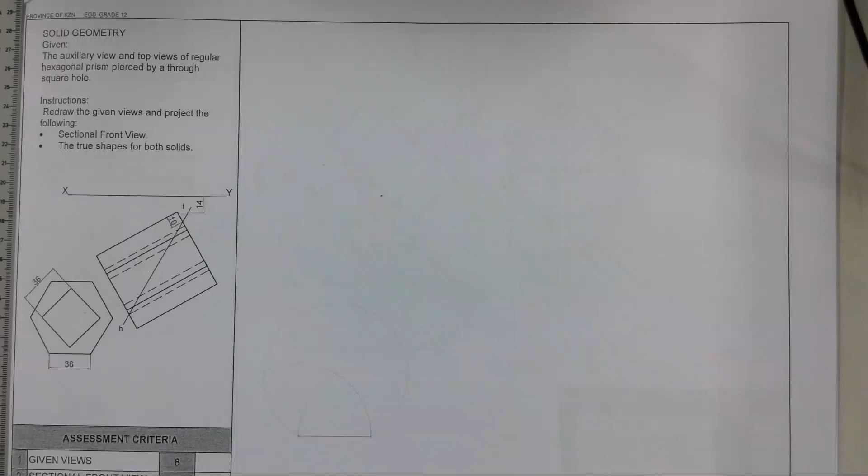Good day, gents. So today we're going to be making an example of this solid geometry question.

I'm going to read it for you. The auxiliary view and top views of a regular hexagonal prism pierced by a through square hole. Instructions: redraw the given views and project the following. Sectional front view, and they would like to have the true shape of both solids.

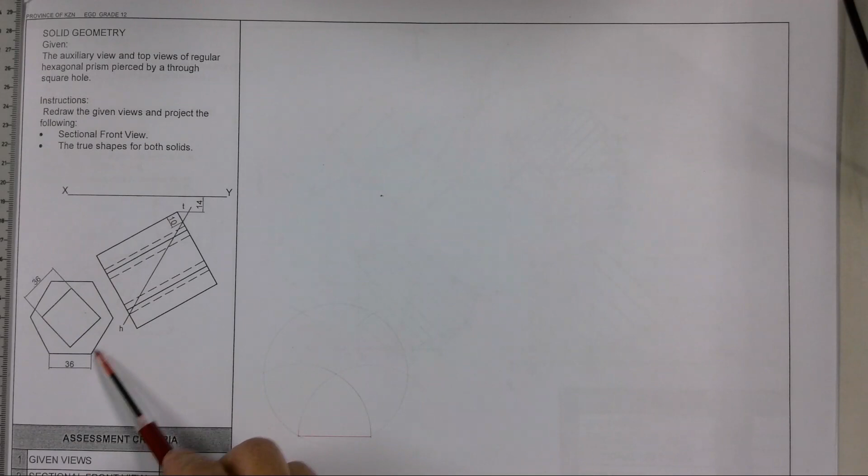So this is obviously an edited version, and when they say the true shape of both solids, they mean the fact that there's obviously a hole through this main solid. Therefore this will have a true shape, the outside hexagonal base, and therefore the inside will also be a true shape, yet it will be treated as a hole.

So I'm going to start off with drawing the auxiliary view first so that I can get to my original view. And in this case here, I've already started. You'll notice that I've got my 36 millimeter base edge down, and I've started constructing by simply drawing with a circle. I could use my 60-degree set square, and so I've gone ahead and joined my construction points already over here, and I'm going to use my 60-degree set square to confirm these points.

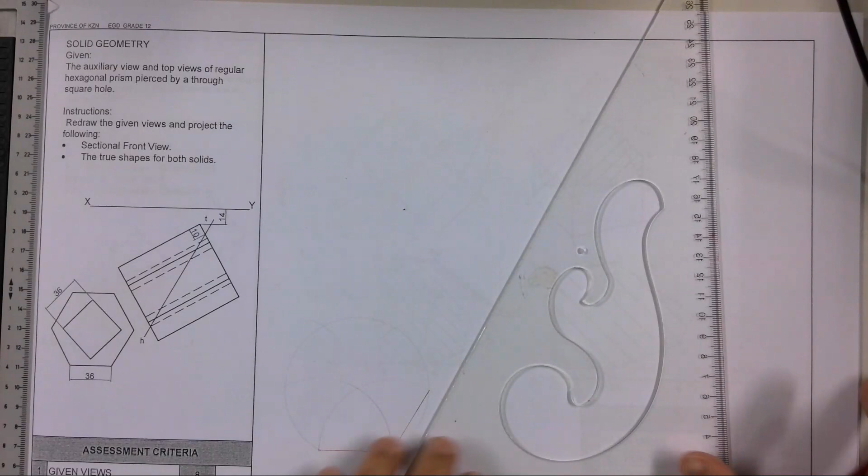And I'm going to keep them in construction. Now I'm drawing with a red pen in this case over here, which is just lightly, just to indicate that which is going to be used.

Alright, and then I also could put my set square to the actual question. You'll see over here that it is actually at a 30-degree angle. So I'm going to be using it because the question doesn't actually state that it is at 30 degrees, but I'm going to start projecting off at 30 degrees.

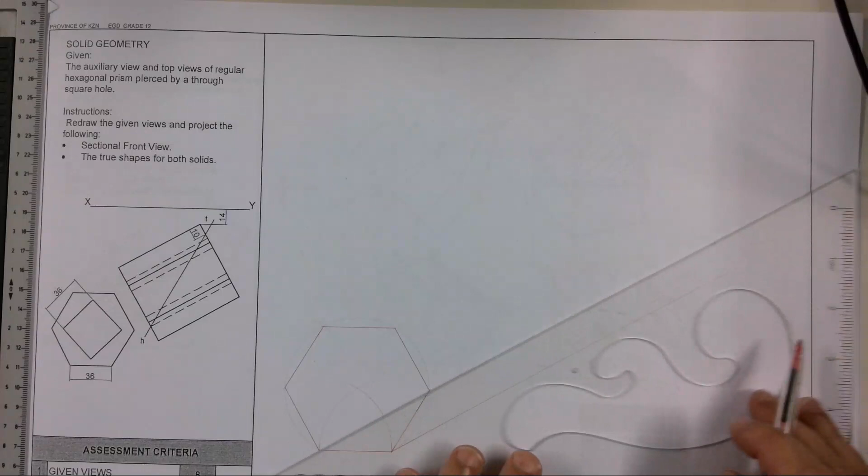The question also doesn't state the height of it, so there's obviously a little bit of an omission of information. I'm going to just make it 70 millimeters. I'll pop the 70 in over here. Alright, and also remember that if you don't have information like this, they might have placed it in the actual question above, which they haven't in this case.

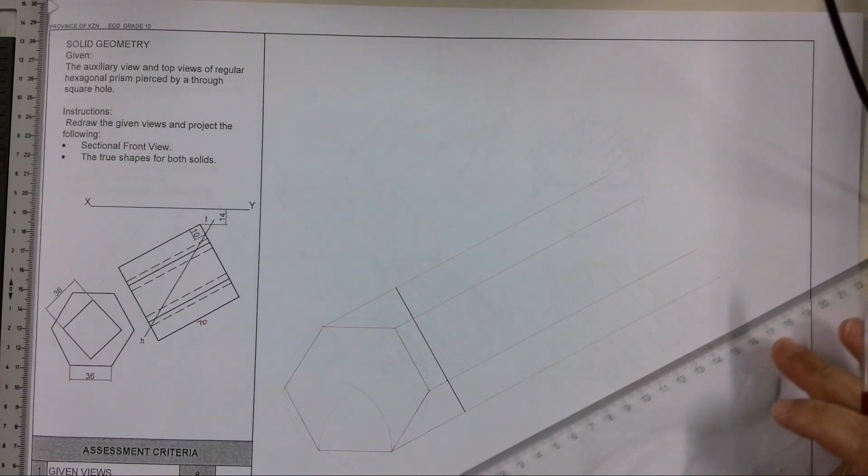Alright, so now from here I'm going to make about a 10 mil difference. At 60 degrees I'm going to separate these shapes, and I'm going to go ahead and draw my view. I'm going to measure off my 70 mils. This is obviously going to go a little faster because these are given views.

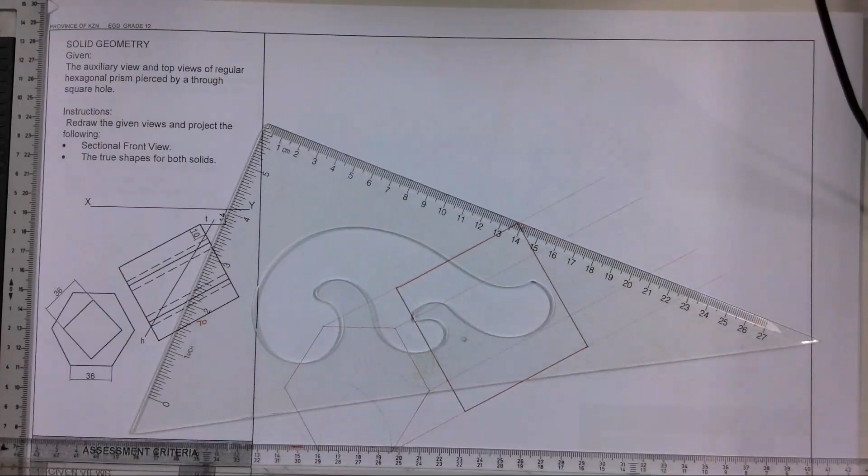And I've got to be careful because if I look at my cutting plane over here, they're literally going to be cutting at 60 degrees as well. Okay, so make sure that you've got your T-square nicely lined up so you get that accurate 60-degree cut. But I'm not going to be focusing on that too much.

It might not be completely 60 degrees because here I see they've actually added a 10 millimeter point. So if I go 10 millimeters in, I'll have my first cut point. And then it's going to go through the bottom corner over here. So I'm going to make sure that that happens. And that I can only do once I've got the auxiliary view properly drawn. So I'm going to go ahead and do that right now.

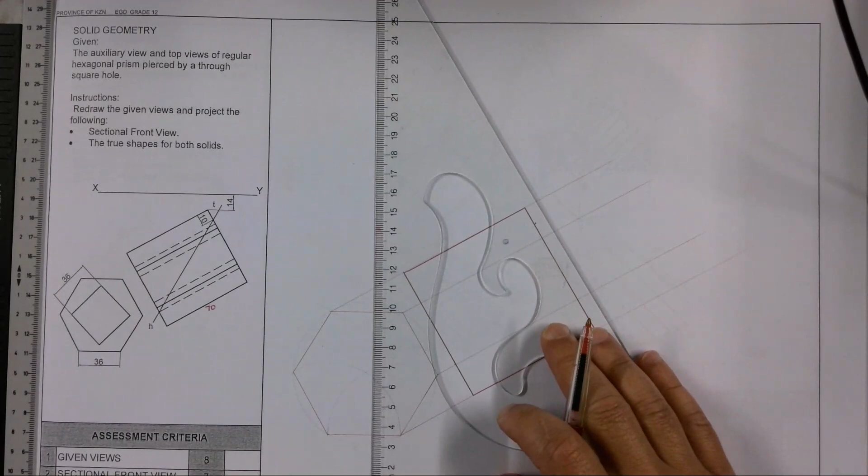I'm going to find the center, which was easily done with the construction of the hexagon. Simply join my diagonals if I have to, and I'm going to use my 45-degree line, but now I have 36 as a base edge, okay, on that question over there. So I'm going to just slide this across again for you. There's your 36 millimeters over here.

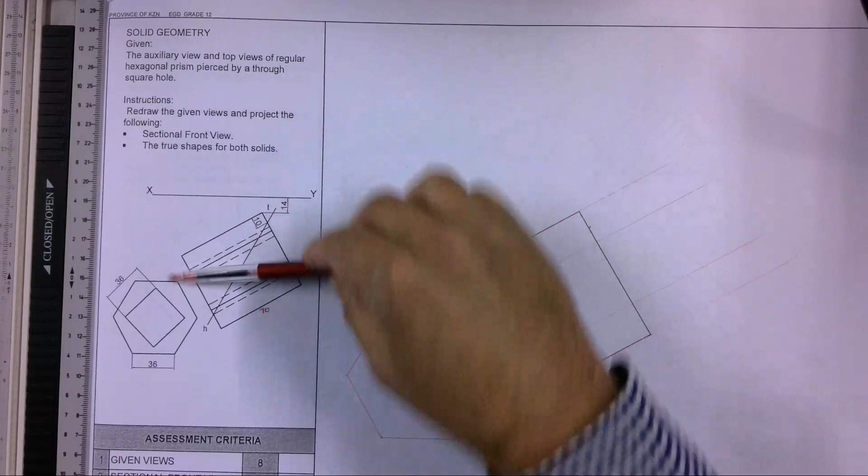So what is the distance from the center to that point over here? Well, I know that if this is 36, I'll be able to divide it into two, which is 18 and 18 from midway. Okay, and if I had to go through the middle at 45 degrees, I'd simply be able to go and measure off the 18 either way.

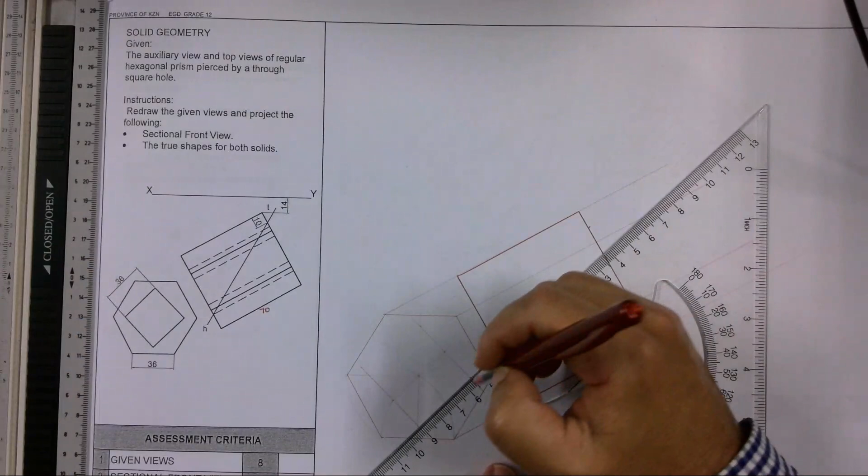Stipulate my 18 on this side here, and I'll go and measure my 18 on this side here, and I'll go construct a 45 degree line and a 45 degree line there, and then I'm going to go take the 18 from here and another 18 from the middle outward, and I'll take my 45 degree line and join them. Now you'll find that they would join nicely on that center line.

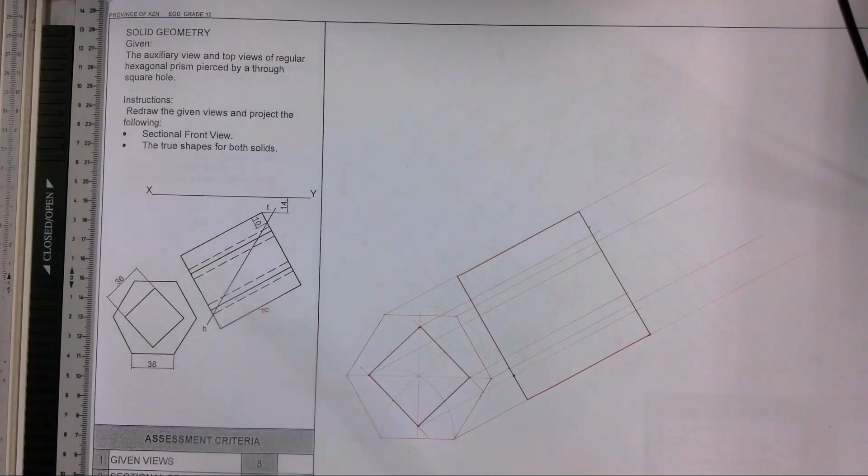Okay, and I need this to obviously project back into my necessary view. Okay, and we're going to project at 30 degrees each one of these, and they said that this shape is going to cut 10 mils in, and it's going to cut through this point over here, so not necessarily 60 degrees.

Now there's my cut line, VT, or sorry, an HT, because it is a horizontal trace, because this drawing is done in the horizontal plane, which gives me my top view. I'm going to take my 14 mils away, construct my XY axis, and if I want to cut off a little bit of time, I'm going to go ahead and project that which I will see.

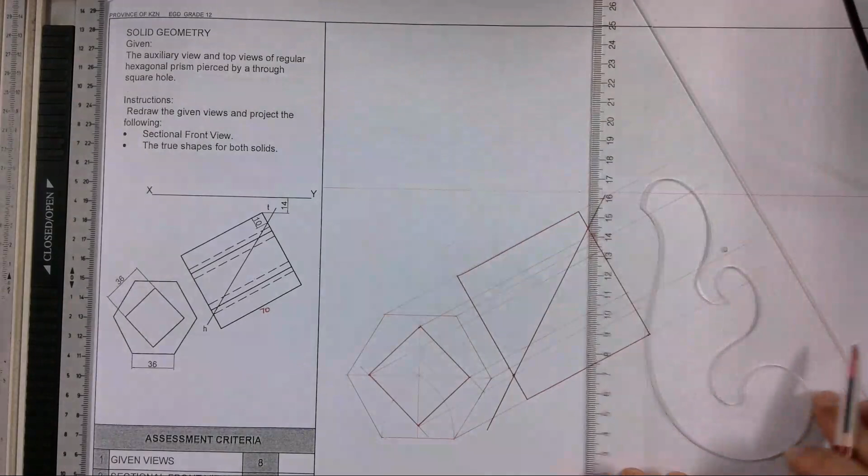I know that there's a cut line here, or cut point rather. I like to distinguish between cut points and base points. Okay, and then I've got to realize, but hang on, I've got a couple of hidden detail lines that need to be drawn, because I'm also going to be cutting through a hole. So this is obviously a hidden detail line. Like so.

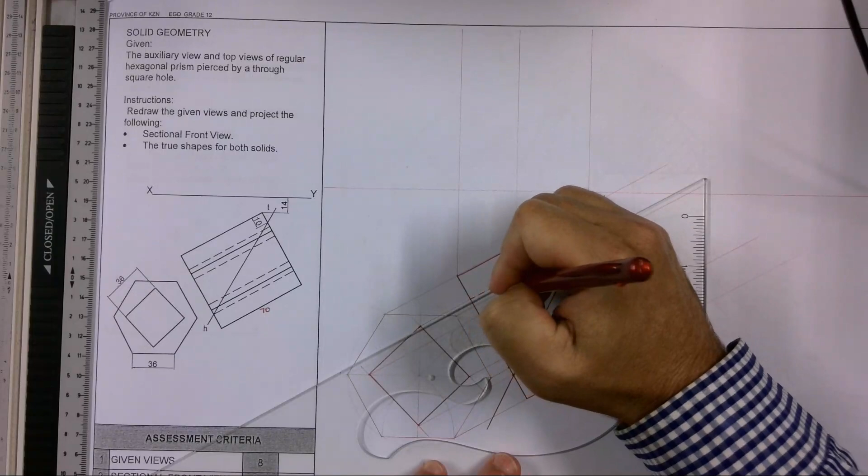I was very quickly going to get these done. Try and stay as consistent as possible when it comes to your hidden detail lines. Alright, and then obviously I have solid lines here for my hexagonal prism, like so. Right, now I'm going to focus on my cut points over here.

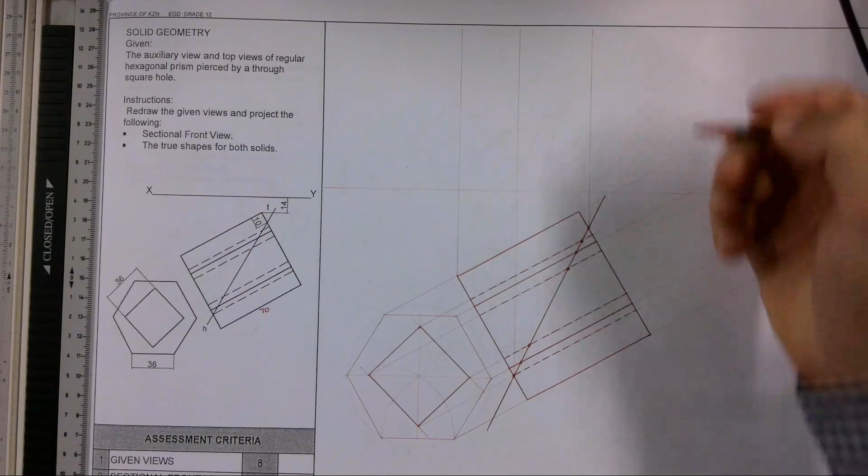I've got a cut point, another cut point, because my cutting plane is going through this object. A whole lot of cutting points over here, and this is where the intricacy starts. This is where I like to start numbering my drawing. So I'm going to start here with 1, 2, 3, 4, 5, 6. 6 has got a top and a bottom. 1 and 5 has got a top and a bottom. 2 and 4 has got a top and a bottom, and 3 has got a top and a bottom.

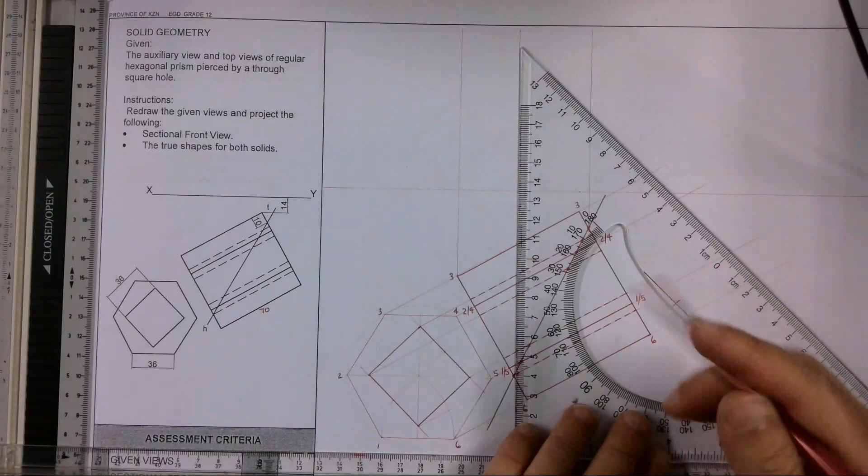Okay, that's very necessary. You'll see that I haven't started numbering or lettering the inside, because I'm just going to be focusing on the hexagonal prism for now, and I'd like to go and project all the information that I have, knowing that I'm going to be cutting this front portion off. So I'm going to be seeing that. I'm going to be looking into there, looking at a cut surface over here, and imagine that we're also going to be seeing the actual base, or the portion that's left over of the base.

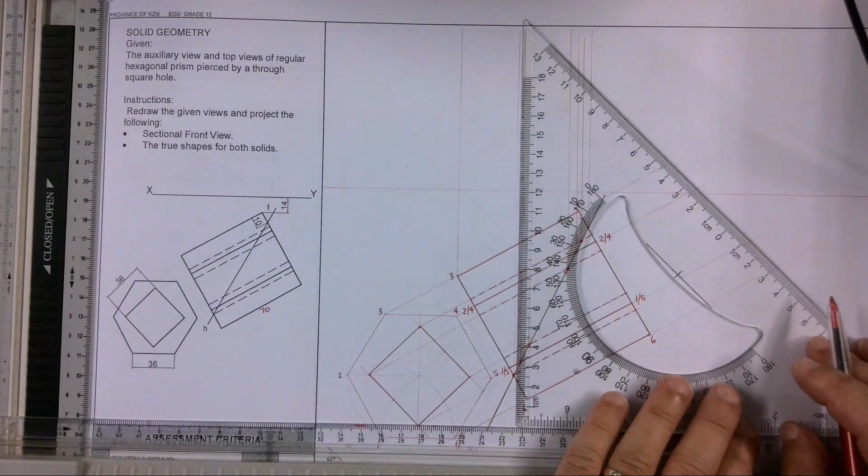Alright, so here we go. I'm going to project all my cut points up. Let's give it a bit of length over there. All my cut points. Actually I only wanted to focus on the cut points of the hexagonal prism, but I'm going to project them all up anyway, and then I'm going to focus on the base points. So the cut surface I need to find.

So I've got 6, and 6 stays. It gets cut away. Therefore, I'm going to next focus on this point over here. I've got to realize that I'm cutting between 2 points, 1 and 6 and 5 and 6. If I want to, I could simply go take this information back onto my auxiliary view and note that this belongs to the hole.

Okay, so watch out. But remember, when I'm cutting through this area over here, this here is cutting between 1 and 6 and 5 and 6. So between 5 and 6, it cuts through over here. And on the back end, it's cutting through over here between 1 and 6. So this just gives you a little bit of a representation as to where it's going to be cutting as well. Right?

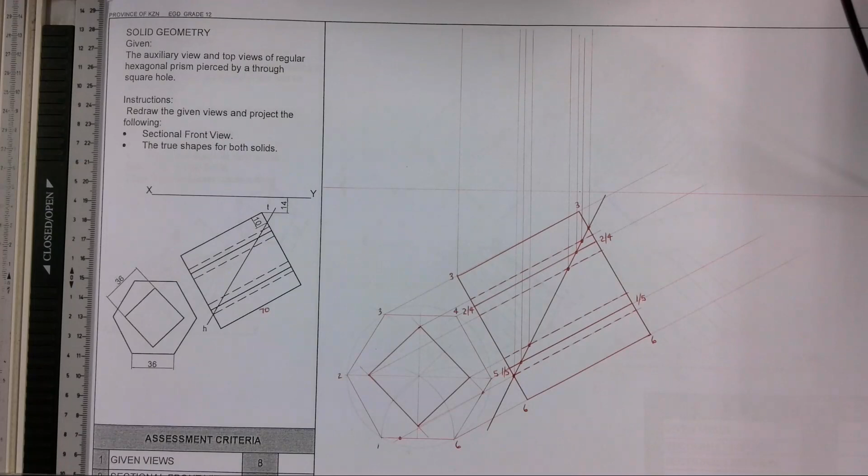So I'll go ahead, I number each one of these points over here. So there I've got to realize that those are going to be my letters. I'm going to call it A and B. And if I go through this, I've got cut point 1 and 5. Then I'll have another cut point, which is the hole, cut point 2 and 4, which I'm going to focus on, another cut point, or 2 cut points over here between 3 and 2 and 3 and 4. This is on a base edge.

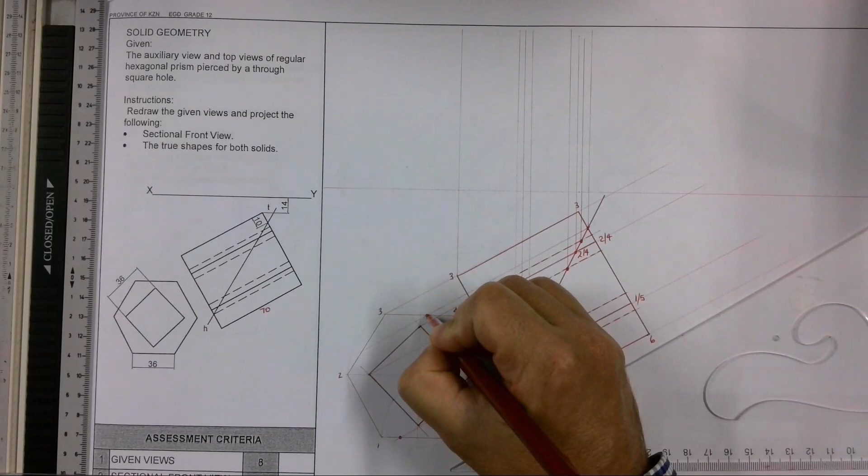Yet again, I can go and project this information back, and I'll be able to see that between 3 and 4, it'll cut over here, and between 2 and 3, it'll cut over here. So there I've got a bit of information as to where it's going to cut. Okay, now the whole idea here is I've got the auxiliary view, and I've drawn it 10 millimeters away from this point over here on purpose so that I can make use of that as a reference point to each one of these heights, as cut points and cut lines.

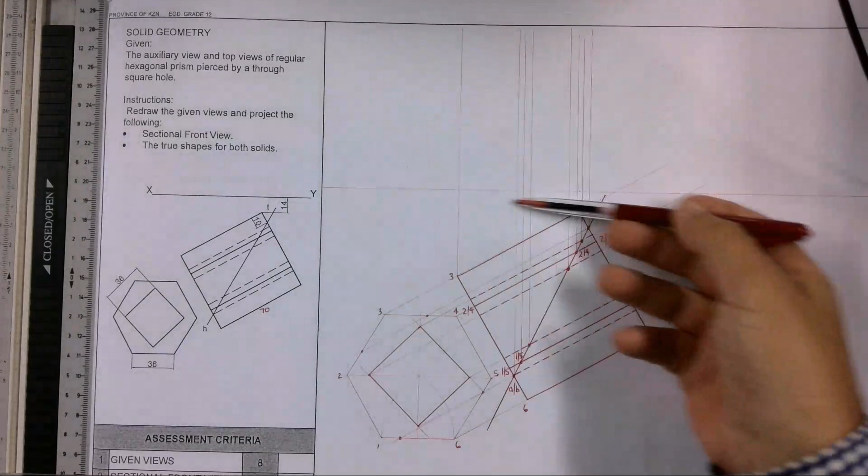Okay, so like I use the term, I need to be able to see the bread before I cut the bread. So I'm going to simply take this area here as being the bread, and I'm going to make sure that I can simply plot the heights. I've got the necessary widths, I just need to measure off the heights. Over here I've got letters C and D, so we'll say that was C and D.

Alright, and I'm going to use those heights now from my reference point, and that's going to be my reference point from which I'm going to be measuring. So I'm going to go from the reference point to C, and C from my reference line, and I mark off and I label it C.

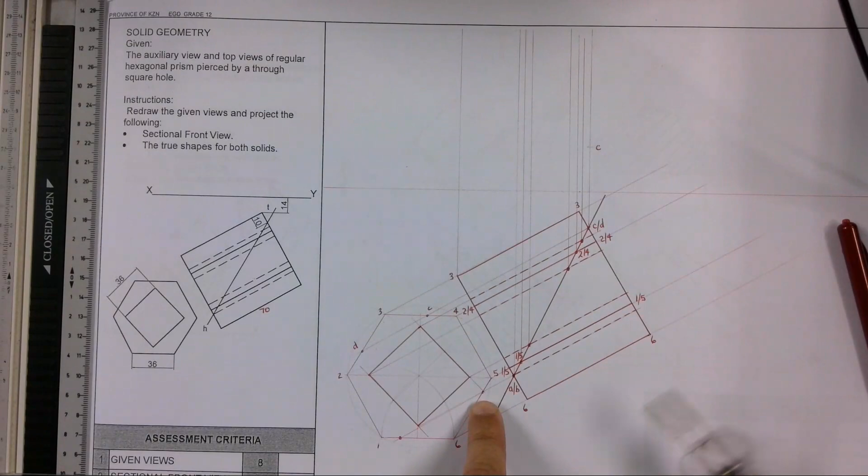I've got the same scenario here. Okay, I label these A and B. I'm going to call this one B and this one A. So on this line over here, I'm going to just produce this slightly to B. When I projected that up from there, I projected, and now I found B.

On that same line over there, I'm going to extend it slightly to A. Along the same line, I'm going to mark it off and find A. So this is just a measure and plot. If I'm projecting off of this view, I'm measuring off of this view. So there's always one view behind I'm measuring it off.

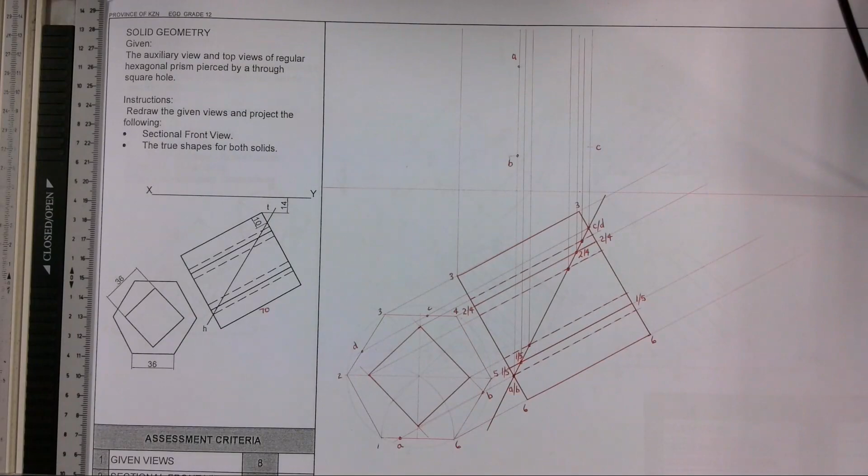Okay, so I've got C, my reference plane, I'm going to make use of D. D is on my reference plane, labeled over there. Okay, so now I've got these two, and I've got the other side, these two. Alright, we know that when we cut through there, they're going to join one another. So I'm going to go ahead and simply join them, because the more I draw, the more I'm feeding my brain with some images. I can actually see what this thing's going to look like.

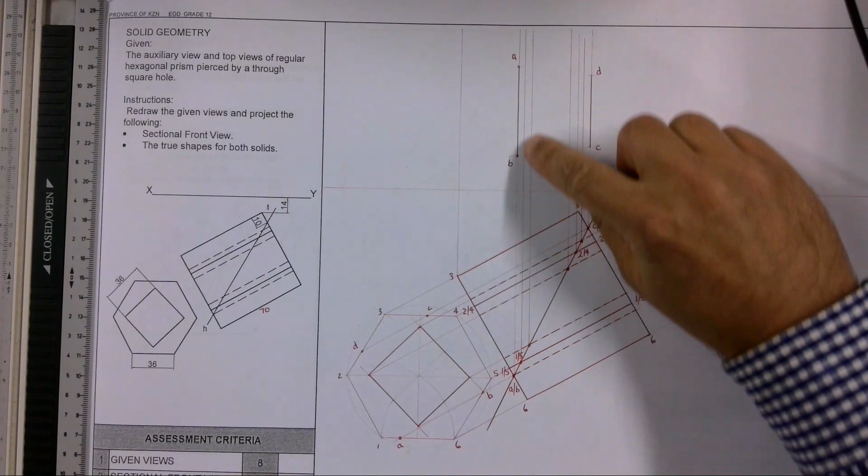Right, my next ones are going to be 1 and 5. So from 1 and 5, cut point 1 and 5, I projected it up. Okay, and I'm going to go measure from there to cut point 1 and 5. Notice that I have a little distance over here that stays behind. Okay, but the heights don't change. So I've still got to measure off of the actual heights.

So number 1, from 1 and 5, notice what I've done over here. I've measured from the reference line to the height of 1, and I pick it up and I go to where number 1 and 5's cut point is, because I'm doing number 1 now, and I follow it all the way to my reference line, and I mark off number 1.

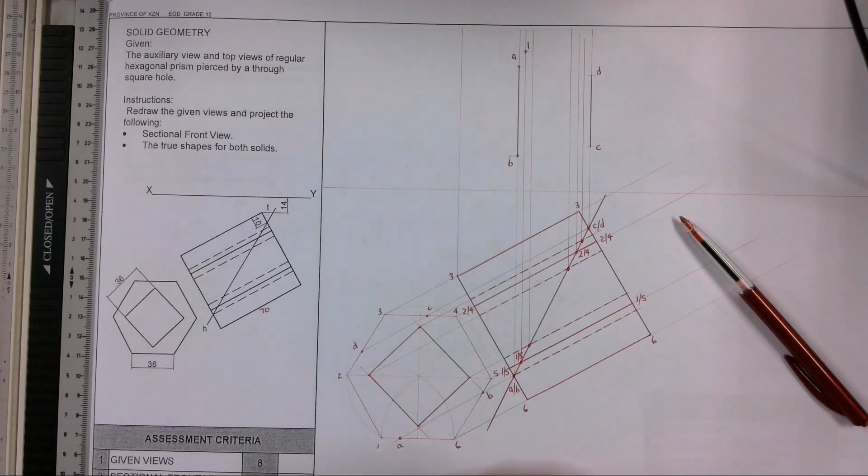Please be sure to pause and retake that if you haven't seen it in the video. But I'm going to be doing this over and over again. Just notice I'm on the reference line again, which I've made 10 millimeters away. So therefore, my front view will be 10 millimeters higher than the ground or the horizontal plane.

Here's number 5. I pick it up. I go along number 5's line, and I go mark it off. Number 5 and number 1 done. Remember, I'm only focusing on the cut surface, so I'm finding all the cut points first. Very strategic. Now I'm going to go to the next one.

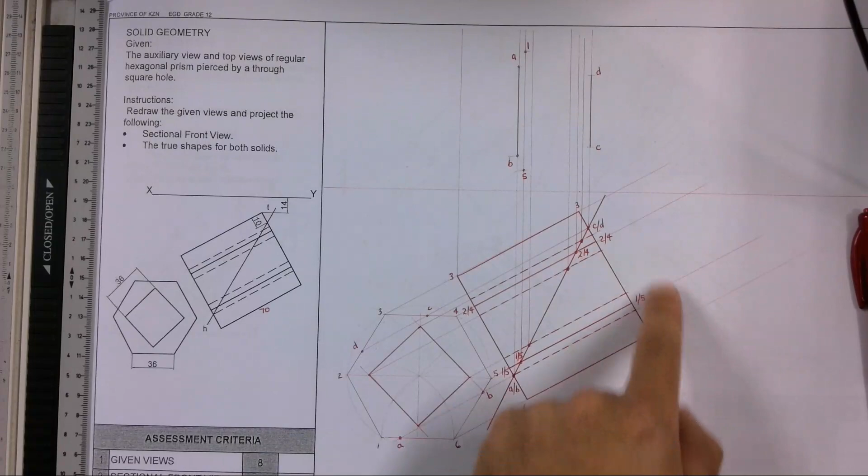It's 2 and 4. Remember, I'm focusing on the hexagonal prism. So 2 and 4 is the next one. I'll go to the reference. Notice that 2 and 4, there it is over there. I'll have 4 at the same height. There it is over there, 4 at the same height. And also at the same height as 1, coming across will be 2, just like 1 over there.

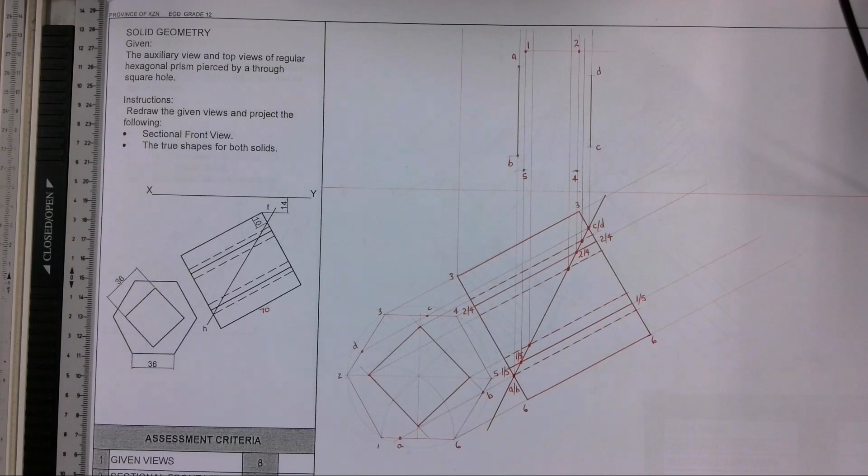So I'm simply going to use my T-square and I'm going to project it right across. I know those are going to be there. So there's 2. I project that on up. There it is now, number 2. Okay, and I know that they're going to be connected to one another. Or will they? 1 and 2 at the top definitely will be. 1 to 2. And obviously I'm looking from either this direction. So here we go, number 1 to 2 will be connected.

And they will be connected down to their cutting points as well. So you'll notice there it goes from 2 down to C, C to D, D back down to 4, 4 all the way to 5, 5 to B, B to A to 1, 1 back to 2.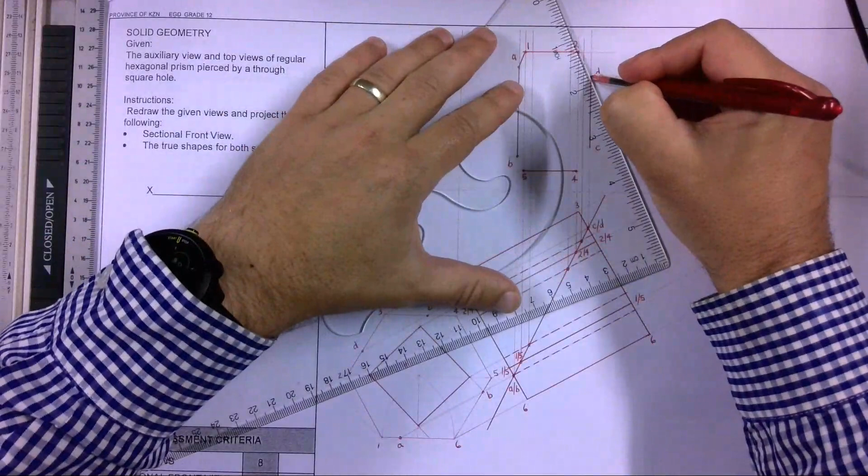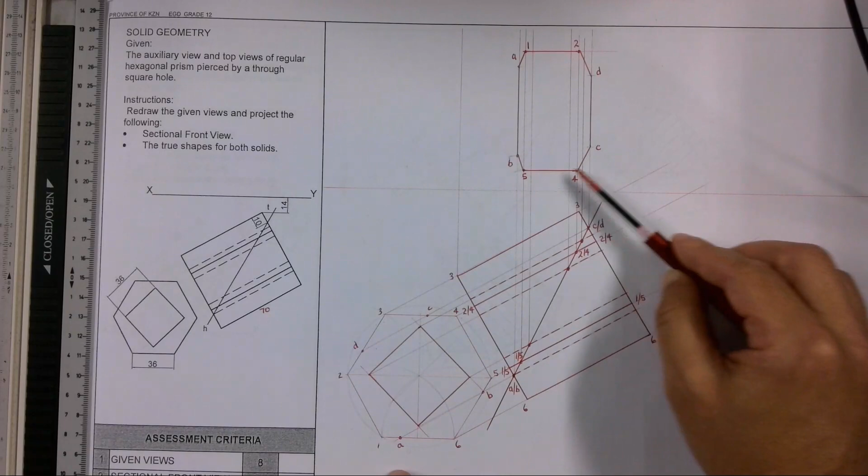Right, so you'll have a slightly shorter line here and here, a slightly longer line here and here, and that is the cut surface. So notice that I've got the cut surface, but now look at what happens over here. I've got 1, 2, 3, 4, 5, 6, 7, 8 cut points to give me my cut surface of the hexagonal based prism. 1, 2, 3, 4, 5, 6, 7, 8. That's another way of checking it.

Alright, remember I haven't placed the square hole in the inside here yet. Those are the ones that are in hidden detail over here. Again, we haven't numbered them, we haven't lettered them. We'll approach that when the time's right. Okay, so now I'm going to go ahead on my front view, and I've got the necessary heights for everything. So I'm going to project this information across. I'm basically using it as an auxiliary view.

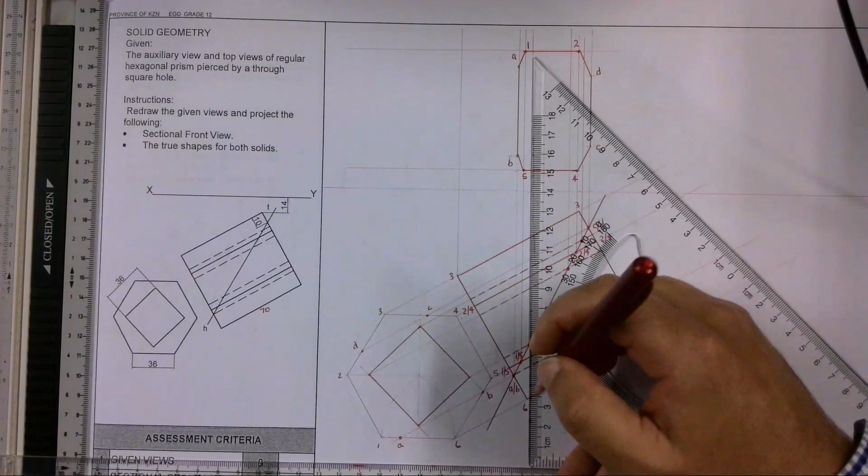Okay, 1 and 2, 4 and 5. However, I don't have 6 in here. I need to obviously use 6 because 6 has been cut off. So if I could find 6, I'd project that across as well. So 6 was over here. That's the portion that's been cut off. Remember, 6 followed up. I'm going to take 6 over here. Oopsie.

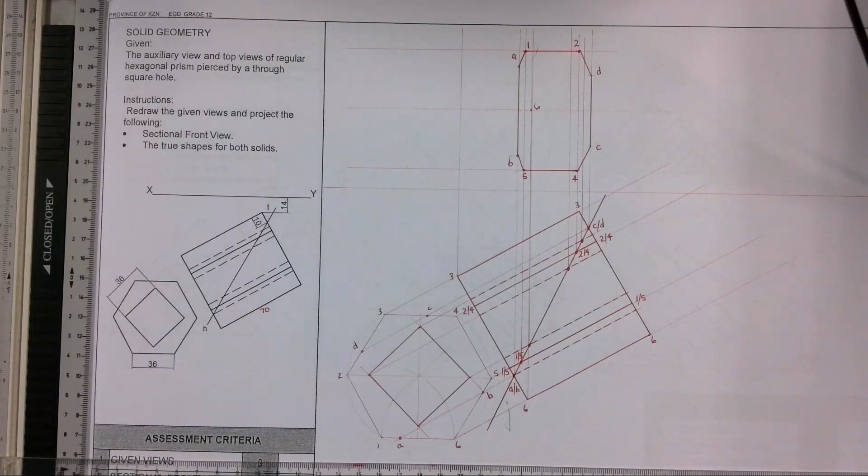Open up to 6. I'm going to use it for my XY axis. This would have been 6, but it got cut off. And I'm going to project that across as well, so I know where that middle line will be, because 3 and 6 will be at the same height. Okay, we'll show you why in a moment. There it is there. 6 and 3 will be at the same height. Okay, so I'm going to go 6/3 on this one.

Right, now that I've got that information, I'm going to project this information up as well. So I'm going to go from 1 and 5, base point 1 and 5. Let's extend that slightly. Base point 1 and 5 will be found over here. These are the uncut versions. Okay, so you can see here everything that is cut away. What do I have left? Okay, I've got A and B, point A and B. There it is, A and B, and then I also have 1 and 5 right behind it. Behind that I've got 2 and 4, and then I've got 3.

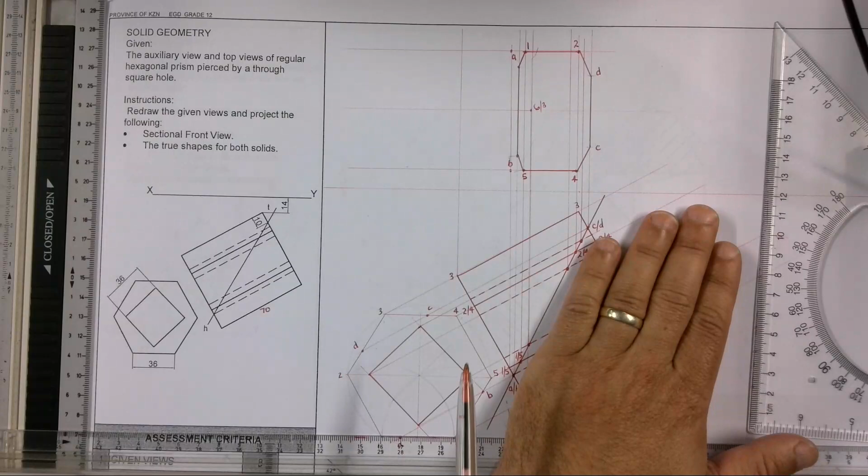So this here, when I look from this angle over here, I can see the base. Okay, I'm going to call the front and the back base. So the front base over here, I can see. So I'm going to go with 5 over here. Number 1. Project 2 and 4 up. That's the next one. Got 2 going across at the height and 4 going across. Okay, so 4, 5. Okay, good. I would have had 6, but 6 is cut off. 1, 2. I need 3 here somehow. So there we go. 3 and 3 meet up over here.

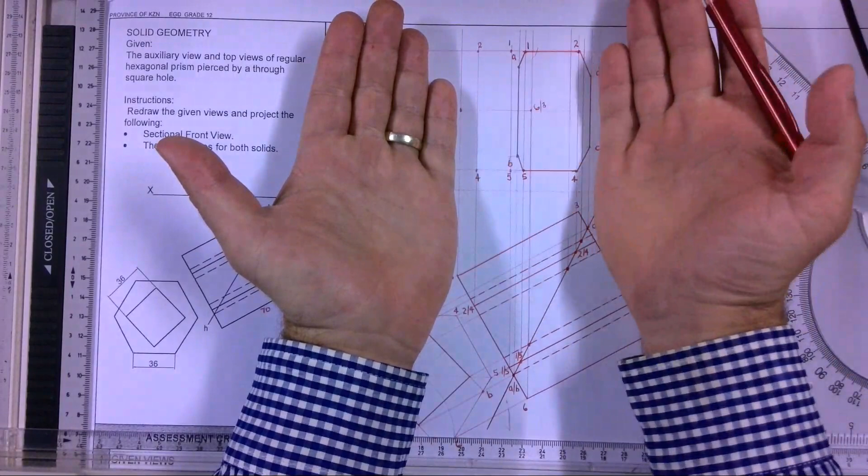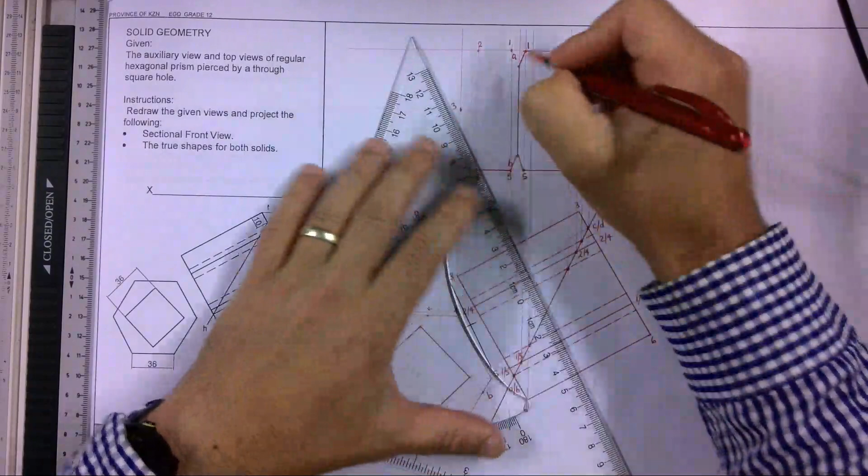So if you think about it, my shape must fit between these points over here. Okay, the cut surface over here and the last point, the widest point on my top view when that is cut away. Right, so now that I've found the points, I'm going to go ahead and join them so that it makes a little bit more sense. The more I draw, yet again, the more I find my brain is fed with information, and it starts making more and more sense for me as I go along.

Right, now here, as I've mentioned when I started drawing, I've got 2 surfaces. I've got this surface from here to here that I'm seeing. That's the front base on this portion over here. Please notice I've only focused on this after I did the cut surface. So now I've got the cut surface. Now on this corner over here, AB, when I project it up, that's my corner over there. They split and they go in 2 different directions.

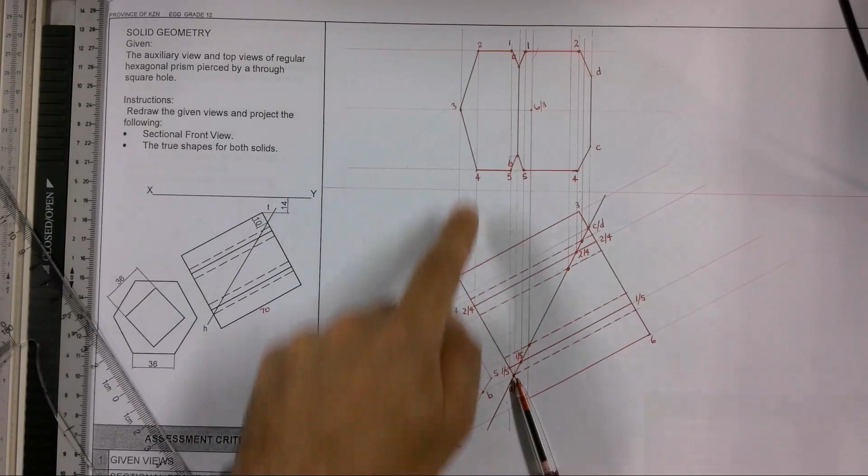This to the left is from here to the left, and then here from the right is from here to the right. That's this cut surface that's going to be hatched, and this portion over here is this front base portion that's left behind with 6 cut away, but does not get hatched because it's not a cut surface. Okay, it doesn't fall along my HT, my horizontal trace, which is in the horizontal plane. Alright, so we've managed to draw the actual view for it.

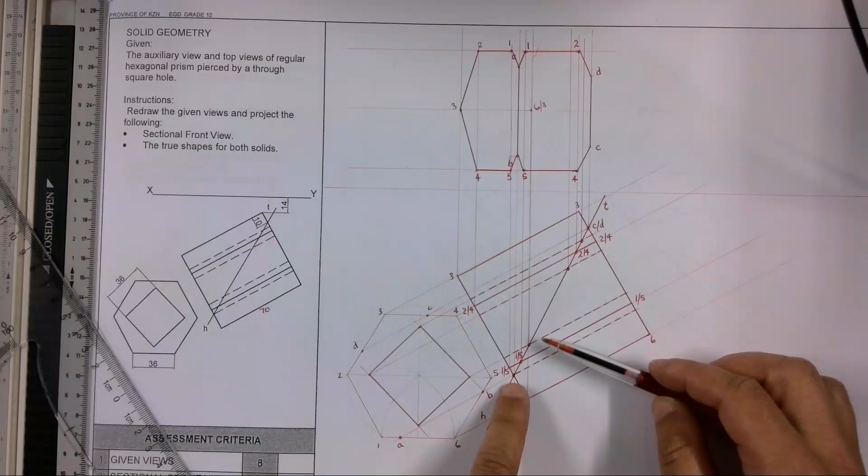If this is your practice drawing, please change these colors for yourself. Make this one green or that one blue, and separate them so that it becomes a little bit more obvious for your sight, and for your brain to read. Okay, so now I have these. I have cut point 8 falling between 8 and 8. Remember, I'm shortening 8 to that point there.

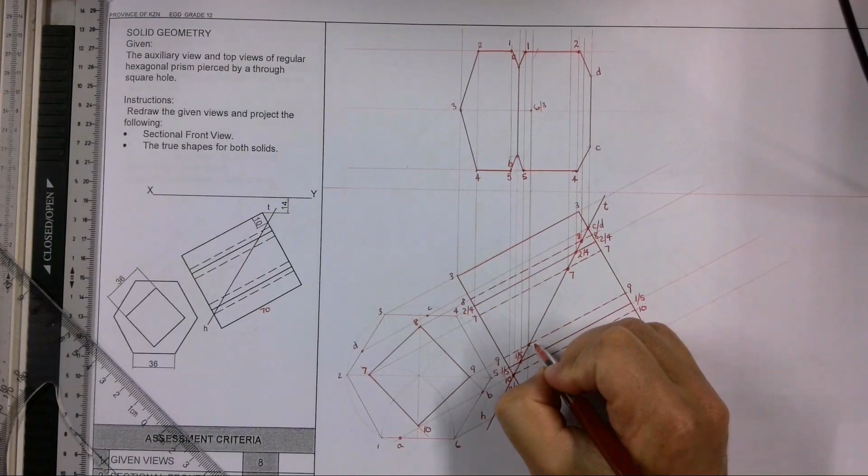7 I'm shortening to over here, so cut point 7. 9 I'm shortening over here, cut point 9, and then 10 is cut down right on the bottom there, so this is all going to disappear. I'll be able to see cut point 10, 9, 7, 8 of this square hole. Yet again, I'm going to project that information up to my front view. So here we go, my cut points. 10 is already projected.

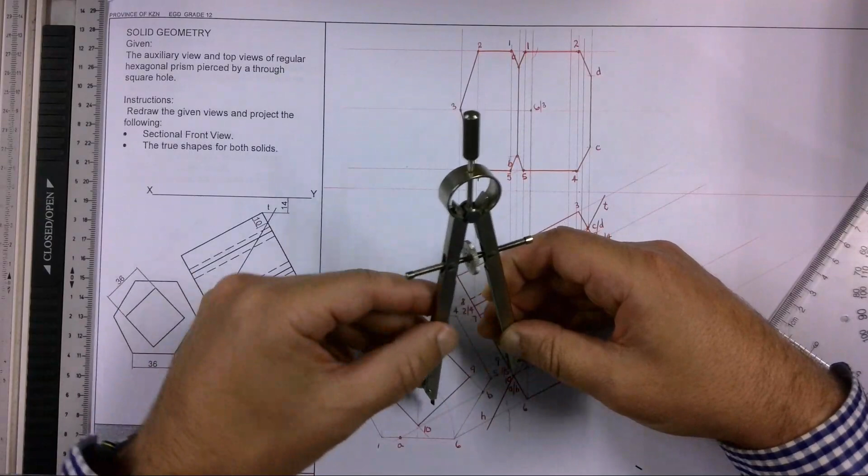9 seems to be projected. 7 is projected. 8 is projected. Now that I have the widths to which they are separated, I need to go measure the heights of each. So I go to my base or my reference line again, and I open it up to 10. On 10 to my reference line again, measure off 10.

Remember, that one was in line. So there's 10. I'm going to label it 10. Remember, that's cut point 10. Okay, it was on that base edge anyway, isn't it? Okay, so we've got to be careful here. Did I do the right thing?

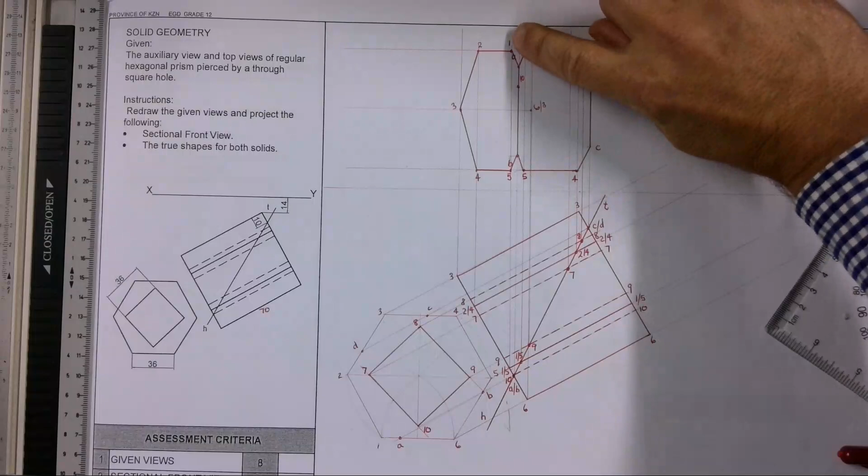Because now I must remember that I'm not cutting on the base edge anymore. I'm focusing on the base surface, on the base itself. So that point 10 is on the base, not on the base edge anymore. Okay, so if it was on the base edge, I would have fallen between 1 and 6 somehow. But this is on the inside. It's on the base surface itself.

Okay. Number 9. Now let's go for something a little bit further along because my compass is already that wide open. 7. I go to cut point 7. Label it over there as 7. Number 9. Go to my reference line. It's 10 millimeters away from my actual auxiliary view. Go to 9. Okay, cut point 9.

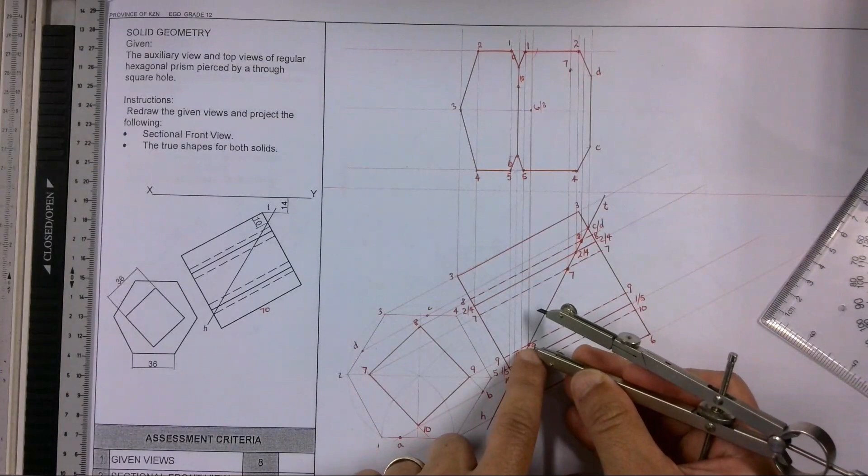Follow it on my reference line. Place number 9. So you can see that I'm doing this so many times. I'm doing the same thing over and over again for each number. Number 8 has got a point over here. We'll cut point 8 on the reference line. And now I found point 8.

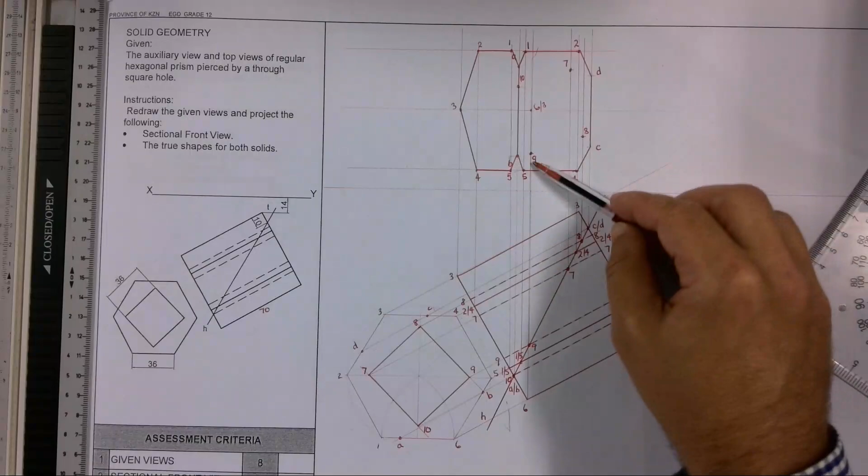Let's see if we've got all the cut points for the inside. So I've got 1, 2, 3, 4. I need 4 cut points. I've got 7, 8, 9, 10. 1, 2, 3, 4 cut points that I can join. Now I found the cut points in the existing sectional surface. We're only focusing on the sectional surface for now. We're going to get onto the actual base surface in a moment. And then we've got to join them. Very interesting.

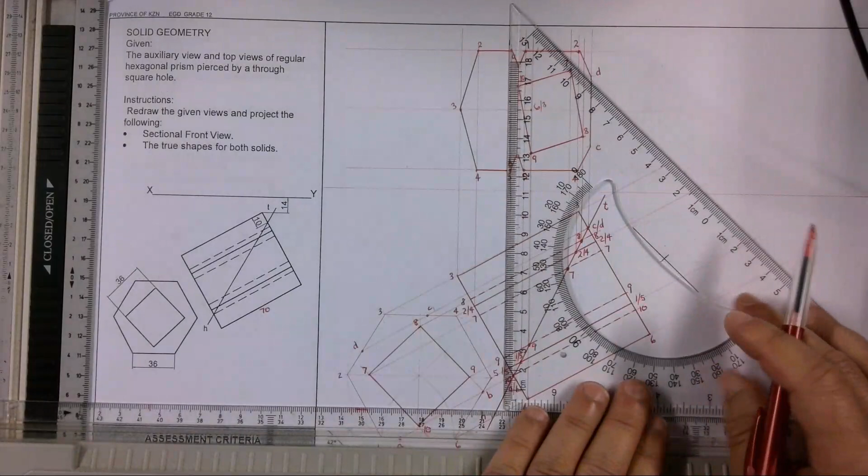Okay, here we go. So now I've collected all the cut points along here. It's all stipulated. I need to get all the actual base points on the left now, which will fit between these two lines of points. Okay. I'll go ahead and I'll project that information. So I've got 10 projected up. I want 9 projected up. I want 7 projected up. Because remember, this is the part that stays behind. And then I want 8 projected up, and 3 is already found.

Again, I have the measurement 4. And if I want to, I've already got the measurements here. I can use this as my auxiliary view. So I've got 8 height away from the reference plane, 9 away from the reference, 10 height, 7's height away from the reference plane. So all I'm going to do is I'm going to project this information across. That makes my life a lot easier and also saves me a lot of time. I don't have to go and measure and plot again.

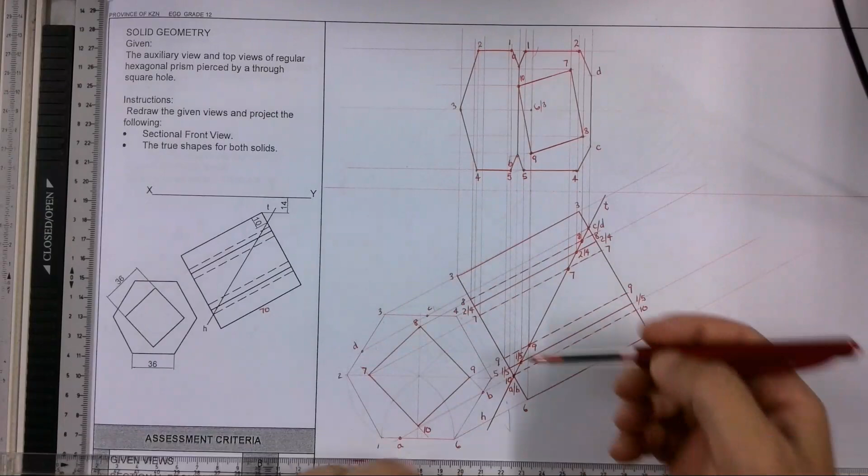Alright, so there we go. I've got 7's line, 10's line, 8's line, and 9's line. So all I need to do now is I need to go measure them up. So there's 8 and 8. I've got 7 and 7. I've got 9 and 9. And obviously we already found 10, which is on that point over there, and I'm going to go ahead and join those because there were only 4 of them.

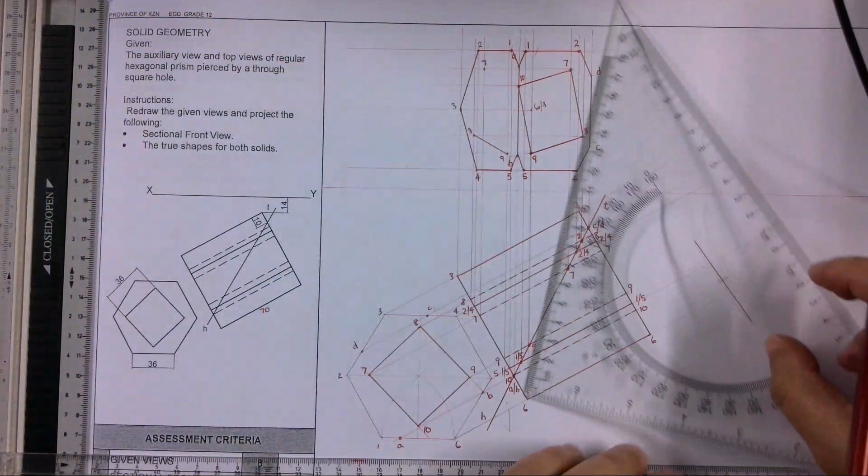I've got to make a point of the fact that they said that I must cut through point 10. Okay, so here you can see I've cut through point 10 in my top view. There we go. Right, so now I can start my hatching. My hatching can go all around this area here because that's the cut surface, but not in this area here because I did not use that as a cut surface.

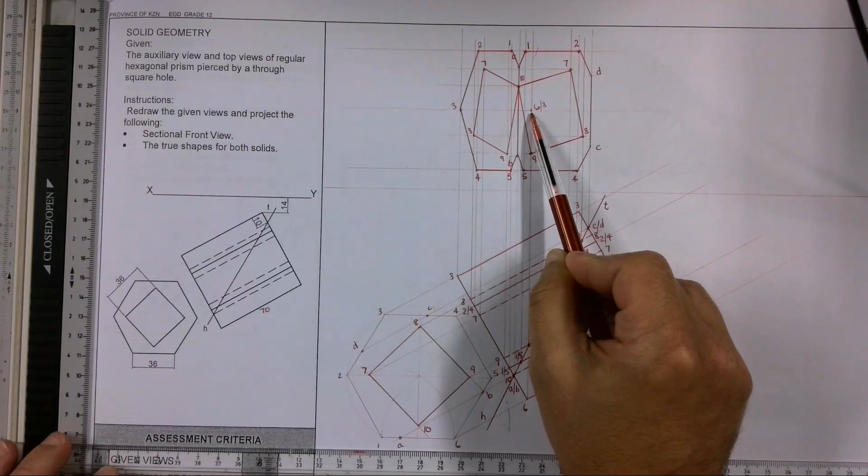However, that which stays behind, I also see that I've got 3 to 3 in the background, so that's automatically going to be hidden detail from there to there. Then I've got 8 to 8, I've got 2 and 4, 2 and 4, 7 and 7, 9 to 9, 1 and 5 to 1 and 5, and then on 10 it's cut. So I've got to go and make sure that I'm closing this here, because remember that's bottom to bottom, eh? Okay, so we're going to close this area here. Okay, because I've got to go 4 to 5, and I've got the top end 4 to 5 as well.

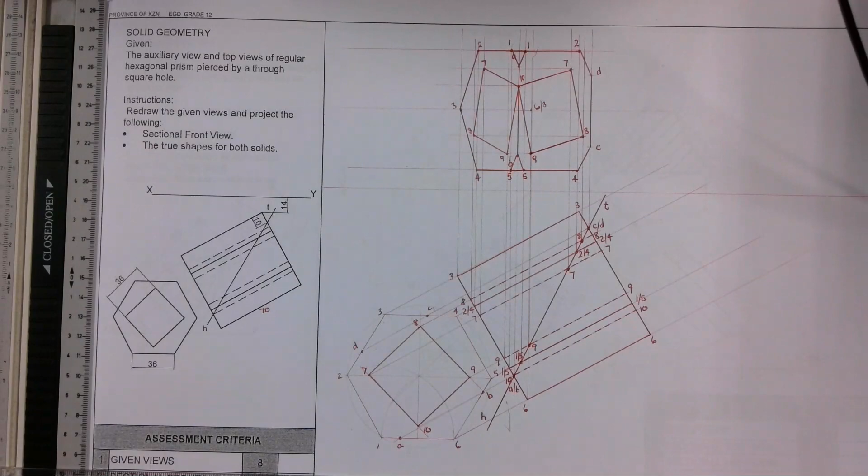And this little triangle over here, and that side there, remember I'm looking from the top, is this little triangle over here and the one at the bottom. Okay, so they must be closed and represented. Okay, now you'll notice that, that which I can see, I must still draw away.

So this is going to be that inside corner, and then I'm going to have hidden detail between here and here, and those are basically going to be the only ones that I'm going to see. So I'm going to go join these by hidden detail. Remember, this is the section where you are going to be putting hidden detail through your cross hatching. So go and join all and focus only on the square hole over here from one side to the other.

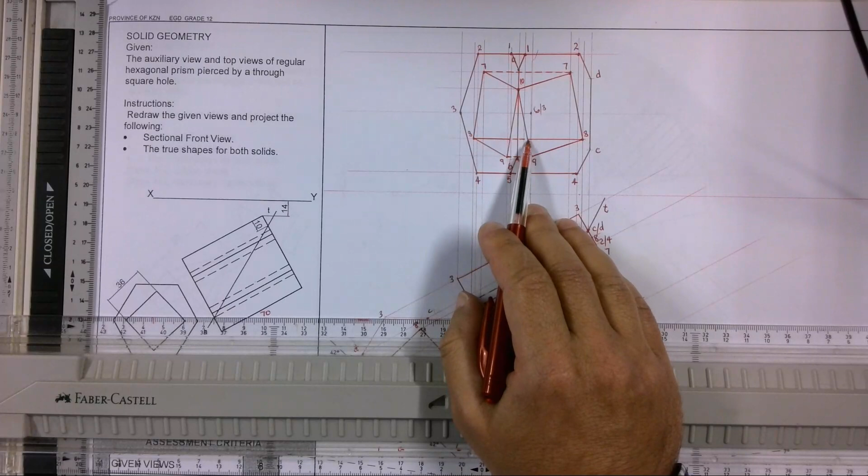10 and 10 are joined already, 9 and 9, 8 and 8 there between the both of them. Please remember to leave a little space over here because we don't want to extend this little line into this area here. You draw from here to here, that's what I see, and then beyond that is hidden detail, and from there to there is what I see again. Alright, now focused on my square hole.

Now I want to go focus on that which is in existence on my hexagonal prism. 3 to 3. Got to have a hidden detail line over there. Let's make sure that we can project number 3 up first. Okay, so 3 I did not do just yet. There it is there. 3 will fall in the back end. That's behind the hole. So I'm going to go hidden detail all the way.

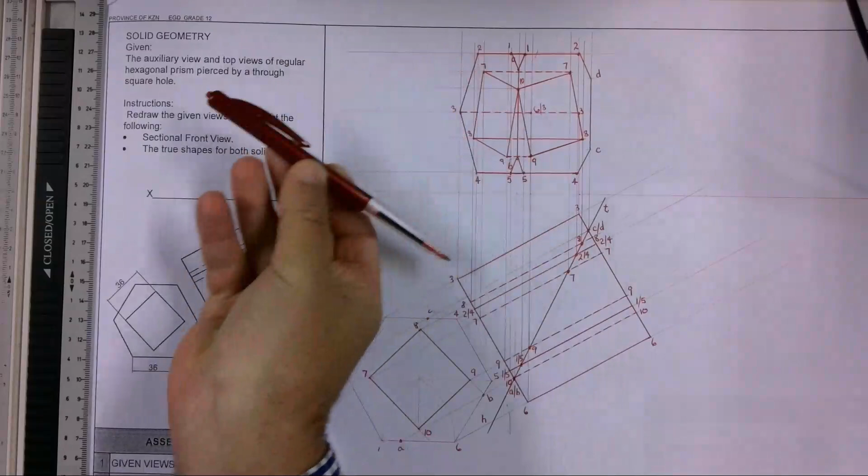Right, remember when I'm looking at it from this direction over here, I cannot see 3 to 3. Okay, it's behind this base over here. Alright, behind the base and also behind the cut surface. Okay, how about 2 and 4 and 2 and 4? Well, they're right at the top, so there they are already joined. And then I'll have 6 and 6, but 6 and 6 is cut away. Alright, so I don't have to worry too much about that.

Go ahead and go and section my view from here to here. Remember, you're going to stop there, pick up pen or pencil there. All the sectioned surface, like so. Look at how I'm using the equal intervals between each one of these. It's just the length of these little lines in my 45-degree set square. A good use of them.

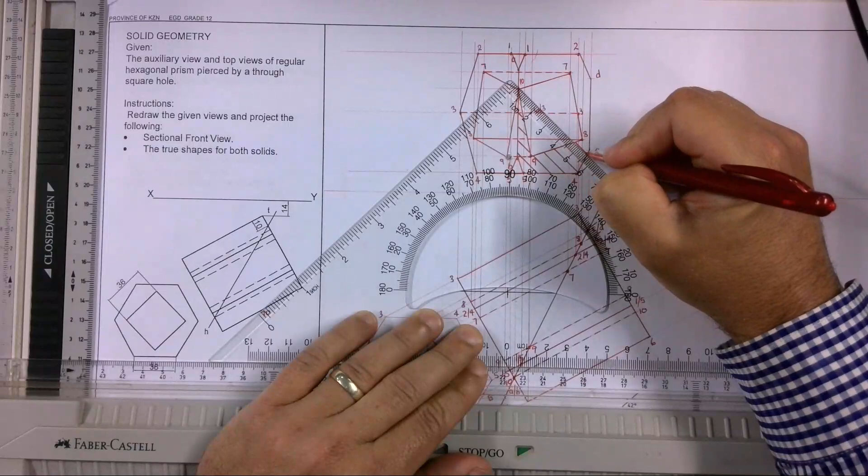A little skill that you can learn is you just tap on the outside line here so you don't actually go over it. So here I just give it a little nick on this side here, and I simply go from that point there to the end, just so that I know I'm not going to go over this little line, over that little line, and I join the two rather, like so. Right, so there are my front view and my top view.

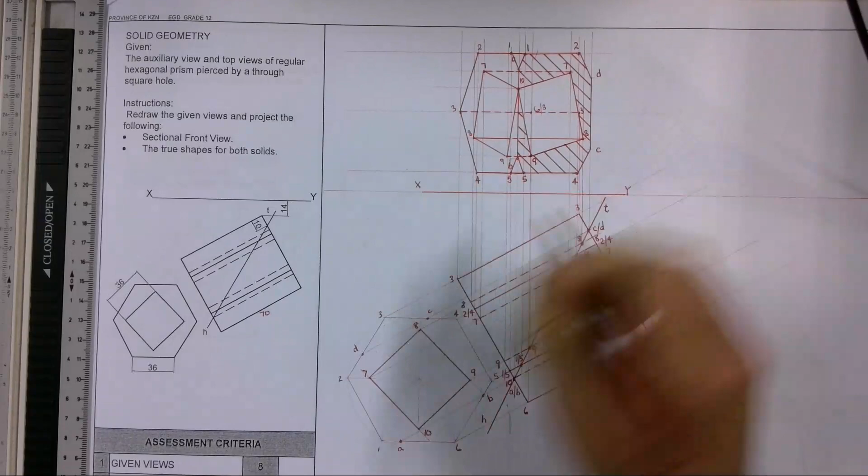They asked for a sectional front view, so I've got my sectional front view. I'll label it as such. And now I know that this is going to be my XY axis. I can go ahead and draw that in dark. I'll give that my X, my Y, because I read from left to right. And if I want to go X1, Y1 for a side view, top to bottom, Y, because I read from top to bottom as well.

Okay, then they ask for a true shape of section. So I'm going to move this across here a little bit. Okay, and I'm going to show you guys that I've already got the widths, or in this case the heights, because this is my front view. So this is the height, so all the heights I already have. So I'm going to use the grid method just to project this across, and this is going to go very quickly. So I'm going to project this across as such, all my cut points, that is.

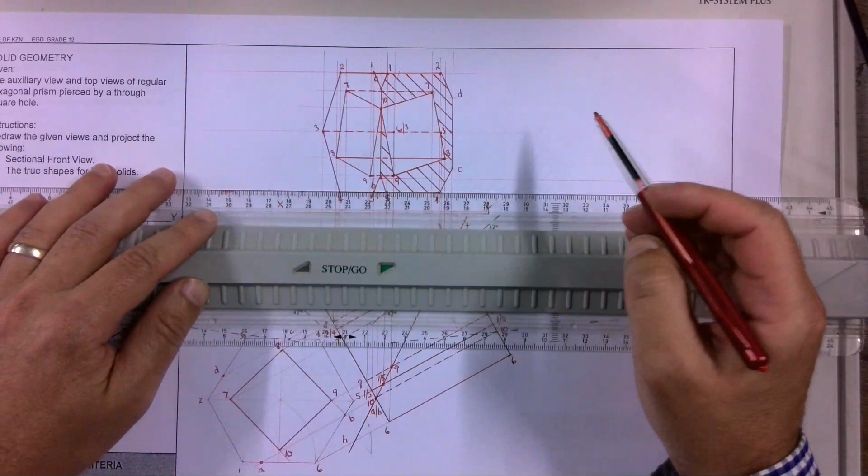So I'm going to go ahead with all my cut points, and obviously I'm going to focus on the actual hexagonal prism first. So all the cut points of it I will project across first, and then that which is on the inside. Okay, so let's make sure we've got all the points. There's another one here. Okay, there. Okay, so this one here was A and B, so I'm going to just quickly label that so I can follow exactly what I'm doing.

A, and the bottom one was B. Notice, don't waste any time in labeling. Do so, because you can always fall back on it and check your work. 1 and 2, that's the height for 1 and 2, and the height for 5 and 4. Okay, and obviously 6 is gone, so I don't need it. I'm going to now go ahead and get the horizontal,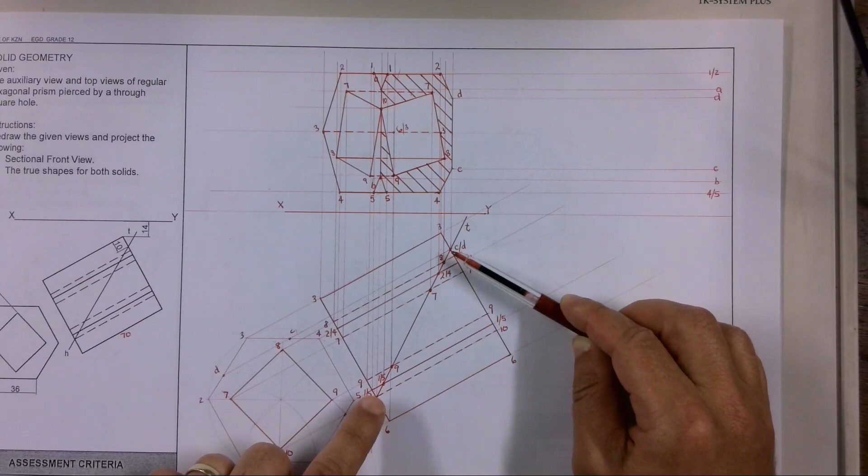the length of it. Now please remember that I've got to use the length along my cut surface. So this is going to be the length I'm going to use. This is the height. Those heights are already projected across. Job done. I need the heights and the lengths to be able to find my true shape of section. So here we go. I'm going to go open up my compass to the entire length from one point where it cuts through the actual object through the other object.

Okay, I'm going to place it over here, where I started off at. So I'm going to swap this around. Okay, I'm going to plot it over here and over here. So that's the full length. I've got point A and B, which also have 10 on it, and then I've got C and D on the other side. Label it.

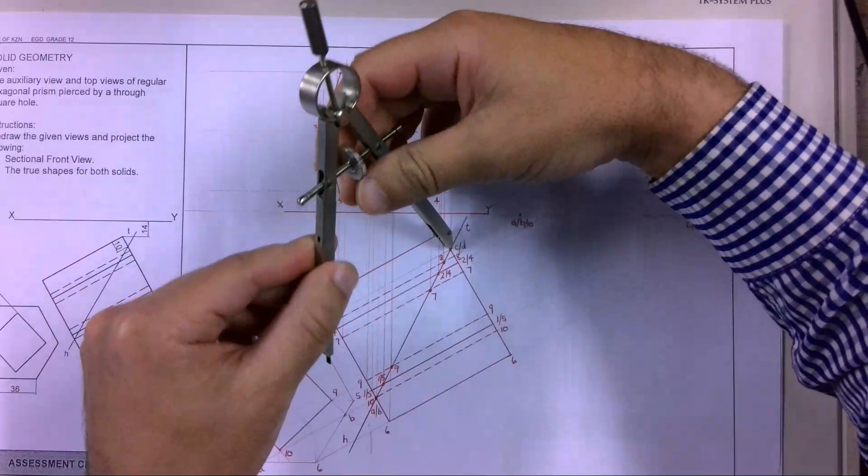Okay, then I'm going to open up my compass from that point C and D, and I'm going to reduce it from C and D to find 1 and 5, from C and D again, reduce it. I'm only focusing on the hex prism for now. Sorry, they go down all the way to 2 and 4. That's also C and D, 2 and 4, over here like such. Okay, and I'm going to project these heights up.

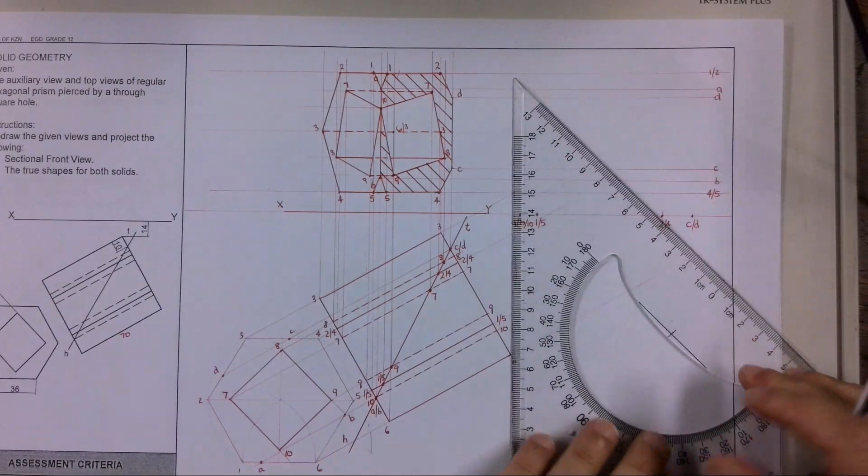Remember I said I'm going to do the grid method, so here this is the grid drawn. Okay, let's see if I've got all the ones. I've got C and D, I've got 2 and 4, I've got 1 and 5, and I've got A and B. 10 was obviously from the actual hole. So A and B, when they match up, so I've got A matching up with A, B matching up with B,

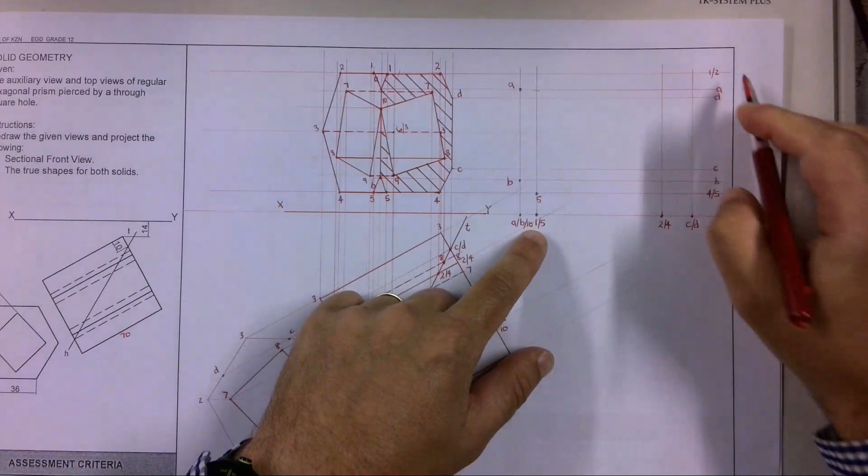and I've got 1 and 5, I've got 2 and 4, I've got C and C, and I've got D and D. Right, yet again I'm going to count. I've got 1, 2, 3, 4, 5, 6, 7, 8. Same amount of cut points, so I've checked my work. Now let's go join them.

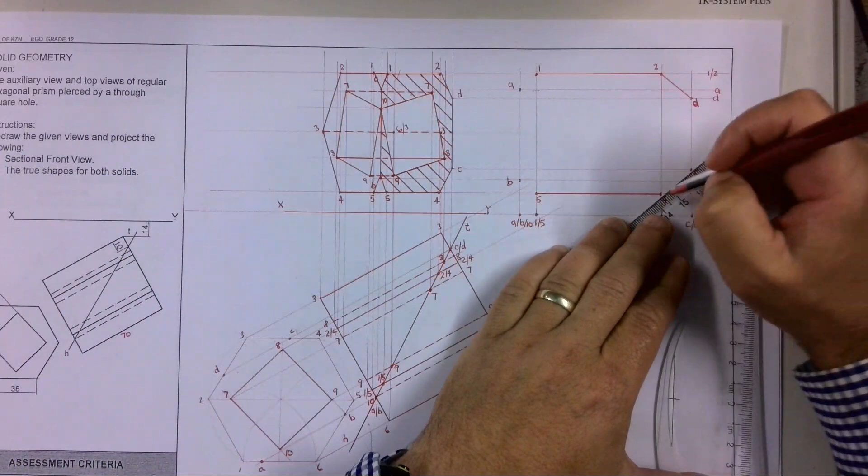Notice how elongated it seems now, but that is the true shape of section. Remember, each one of these lines are the true length lines of 2 to D, 1 to 2, 5 to 4, etc. If I'm joining all the true length lines, I'm bound to find the true shape. So there are other methods to be able to find the true shape, but this is definitely, in my opinion, a far quicker method to do so. Like that, and like that.

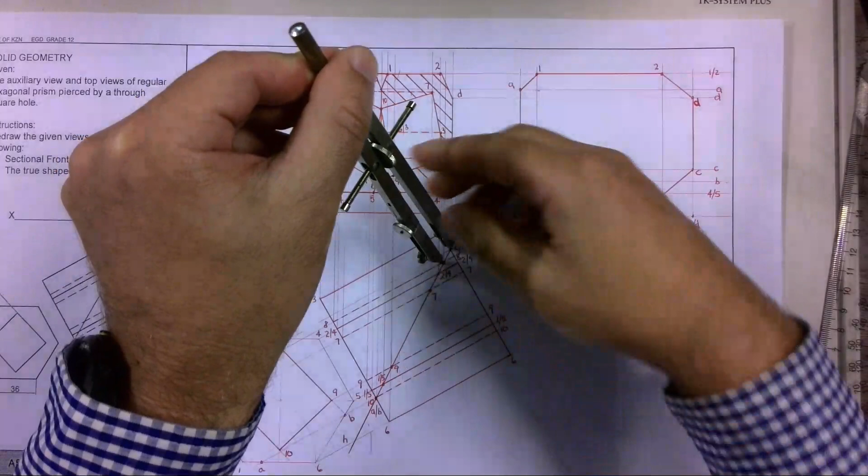Right, now I'm going to do the same. I'm going to go ahead on the cut surface. I'm going to focus on my hole. So I've got it over here, but now remember, these are only the distances or the widths away from one another. Okay, I've already got the heights for each, and I need to project them as well. So I'm going to go to 8. Right, so from C and D, I'm going to measure 8. Again, 7.

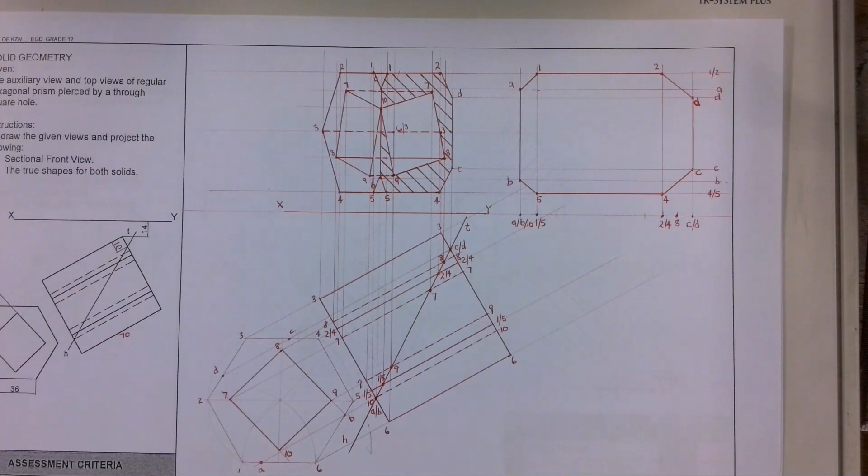Open up to number 9. And I'm going to open up to my last one, which is 10. I've already got 10, so I know exactly where 10 will be placed. It's the full length of the actual line. I'm going to go project these lines up. There's 8. Okay, so my first one was 8, then 7, then 9, and then 10, which is in line with A and B.

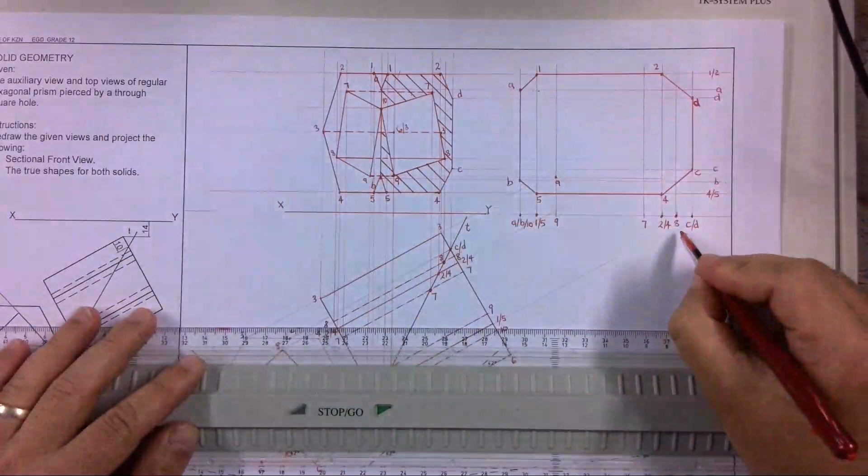Right, let's go take number 9 across. 9 and 9 found. Got 8 across. 8 and 8 found. I'm going to take number 10 across. And 10 met over here, and I'm going to take 7 across as well, and 7 with 7. Right, I've got the 4 cut points, and I'm going to go join them, and everything around them will get hatched.

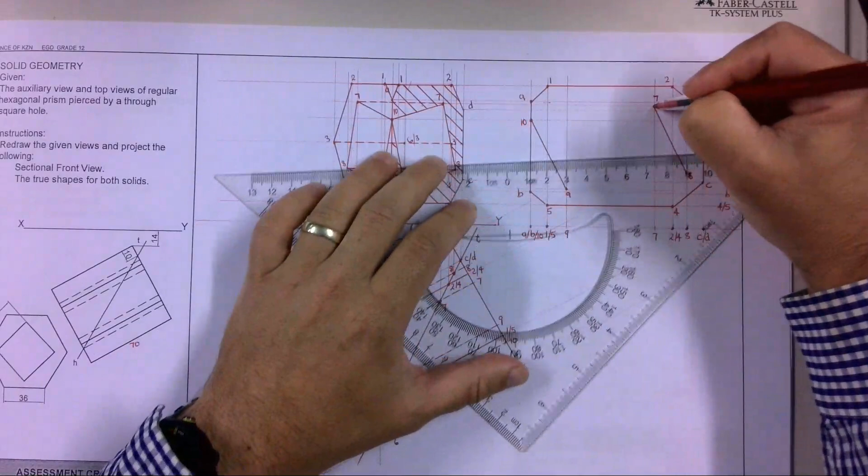Now I've got the true shape of both my objects as stipulated in the question. Okay, and I've got to go and put the hatching in there and label my view as true shape of section. Watch out for the inside, because you're not cutting through anything on the inside. It's not a solid surface where the hole is, so be careful. And so you'll continue until you're done.

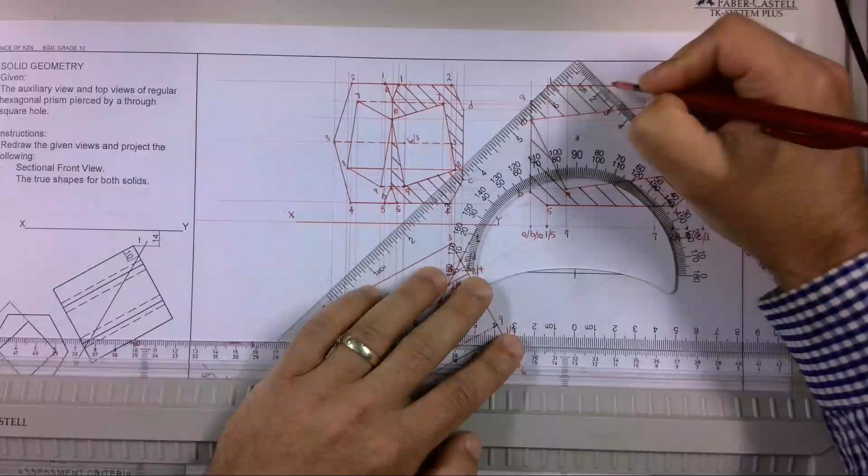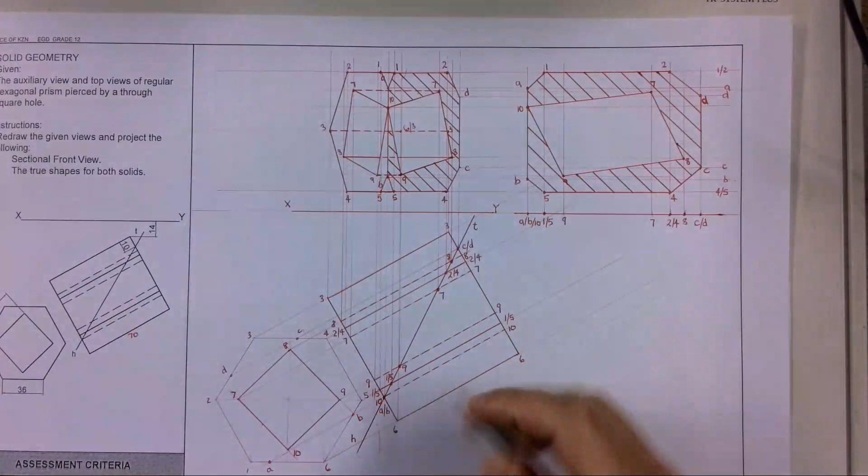And that one falls over. Right, so that's the grid method. The entire actual drawing, that's me explaining it to you and making sure that it falls within a 42-minute period. This will also have its own XY axis, please. So it is a different view, so you'll include it as an XY axis and you'll label it, in this case over here, X1, Y1. And if you had an XY axis for your auxiliary view, if you made it X1, Y1, this will naturally become X2, Y2.